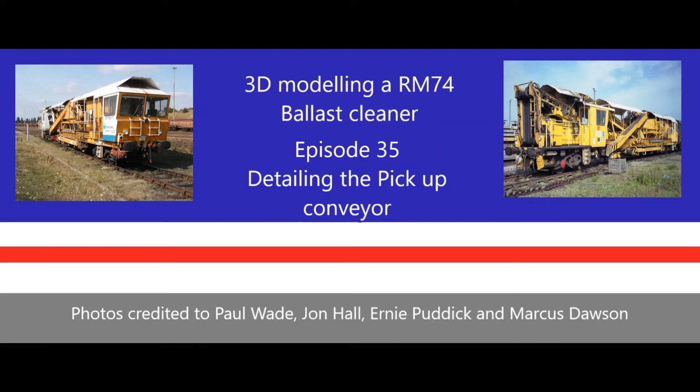In today's episode I'm going to start to look at some of the non-symmetrical detailing that's on the pickup chute here. If we look at the photograph, you can see there's a couple of ribs, 4 or 5 ribs coming along here, and some rivets. There's also some detail that I'm not going to be overly concerned about, like the top and the bottom edge, all the way along. You know, this is just a rubber mat coming along here.

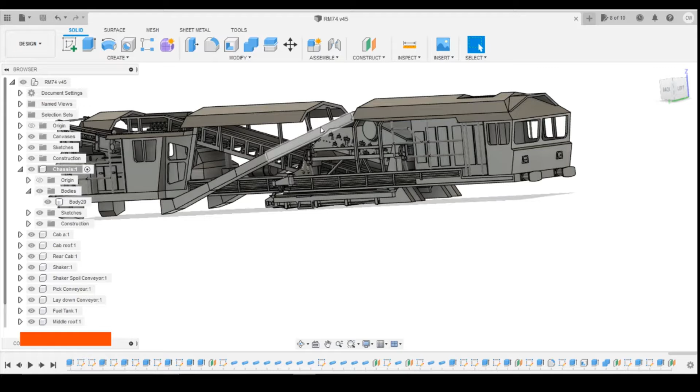This part here I will sort of do something here to give us the ribbed effect a little bit better, but certainly not the mats coming across the top sticking out. We will look at sort of adding the rivets in down the side there. So these ribs, they look like they start roughly where this post is here, so it's going to be all on this face that we're looking to draw these.

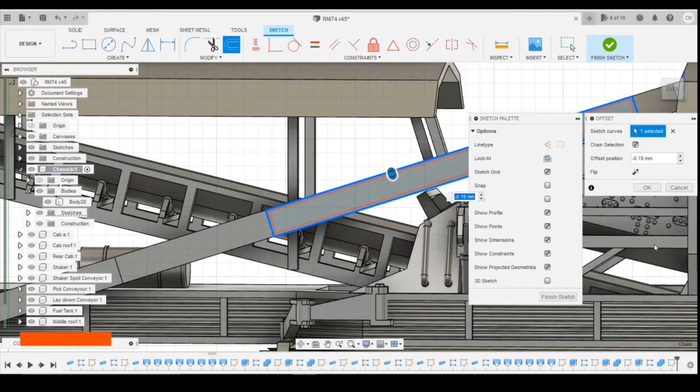So what I'm thinking of doing first of all is just putting an offset edge on the outside here. It's going to come inboard ever so slightly, maybe minus 0.2. And I think what I'll actually do is get rid of that line and that line, and just actually extend these lines to the end here. And on this, oops, do that. Extend these ones as well to that line,

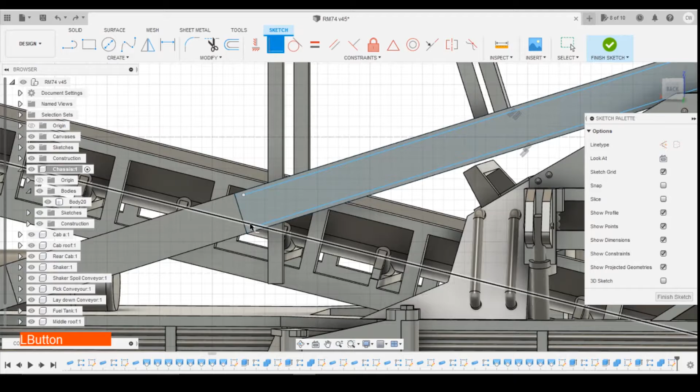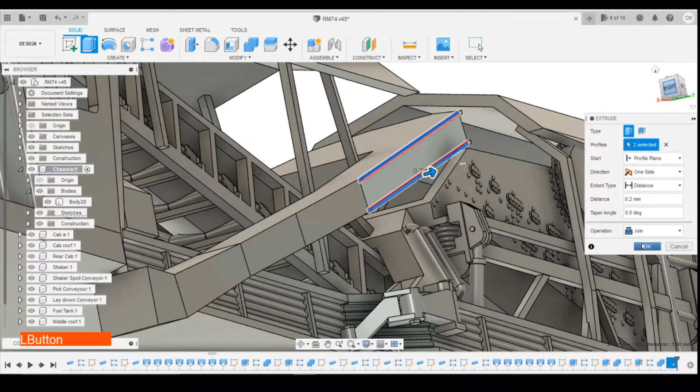and we can select those two profiles. I'm just going to extrude these, say 0.2, stick out a small amount, join, and we can put our ribs along there. So the first rib is slightly inboard of that one. So again, we're going to go the inside profile here, and we'll have to use a 3-point rectangle. Let's project first of all that line and that line, and we'll get that 3-point rectangle.

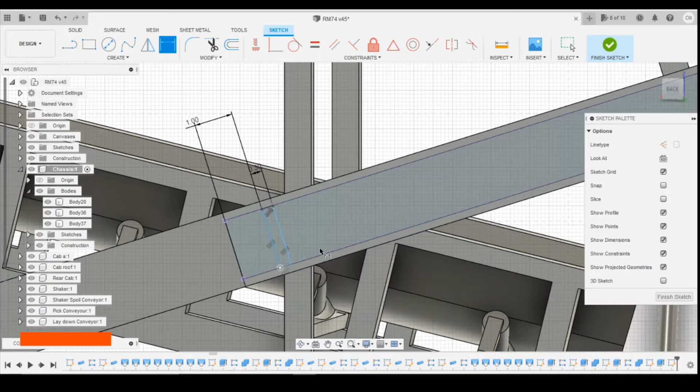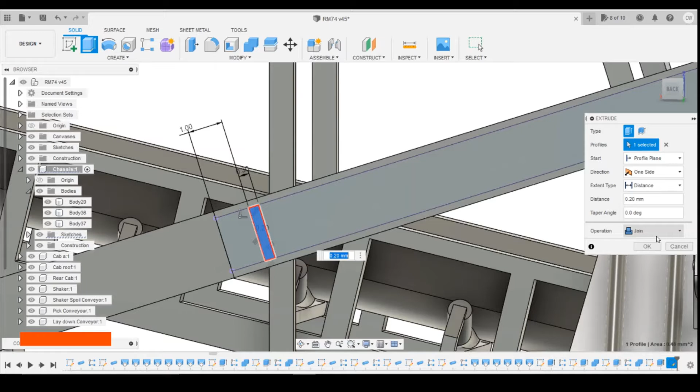So if we stick to the top edge, let's go for 0.3 thickness, I think, and then that can snap to the bottom edge, and then define the distance. I'm going to go for 1mm there. Not sure why that's not fully defined though. That's all constrained, so it should be. And we'll just fix. That's all extrude. Again, get that face. Extrude to that outer surface again. Let's try join to start with and see if it will pattern along using that. I'm pretty sure it won't.

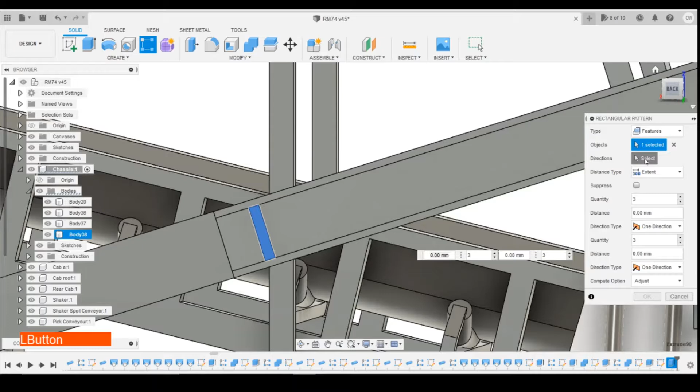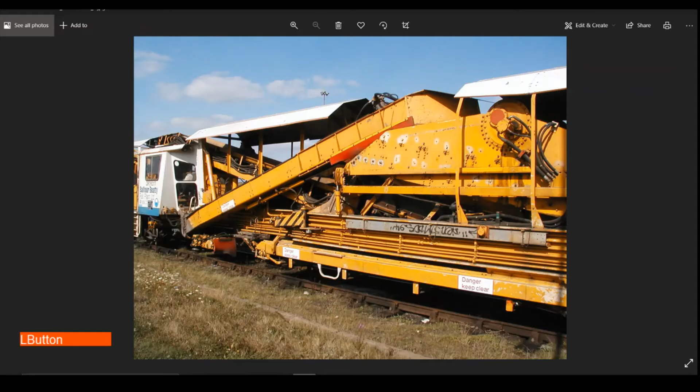So do feature. Yeah, see, it's going to go all the way along the top. So we edit that feature to be new body, and then pattern. Then it'll do it separately, direction along. And I think I said there was 5 of these. 2, 3, 4, 5. Yep. I'm just going to do the 5, and I'm going to bring those. That position there, I think. I'm going to do that 21.5 along, and then 5 of those. And then we can combine all of this lot together.

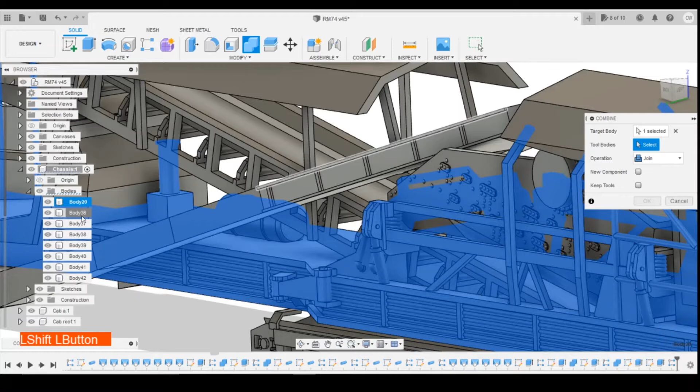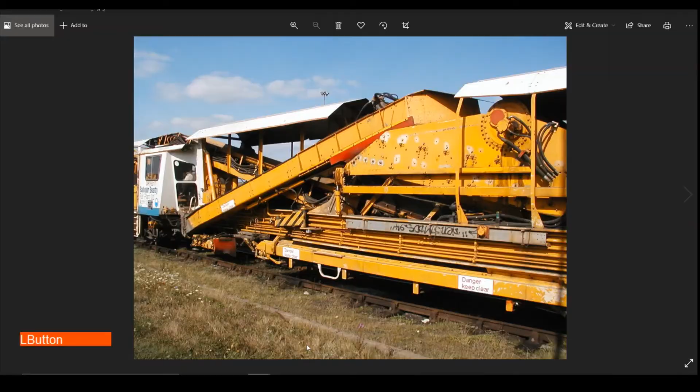So these ribs aren't on the other side of the conveyor belt here. I'm not entirely sure why this side's got them but this side hasn't, but I'll just go with what we can see. And then we've got a load of rivets we can look to add on here. We'll start from this bottom edge. I'm not going to worry too much about this slight recess area here. Okay, so I'm going to look at the rivets here. I'm going to start on this end. I think I'm going to start with these 4 here.

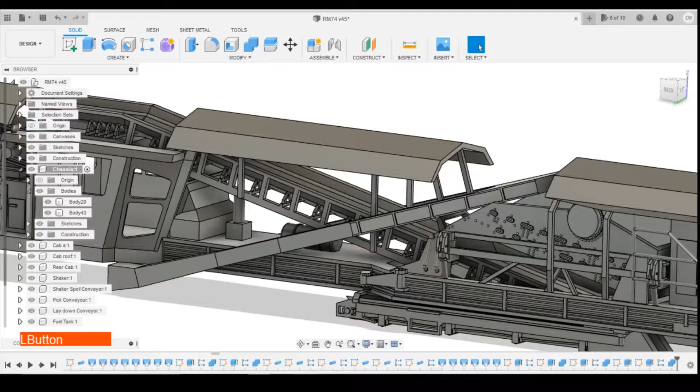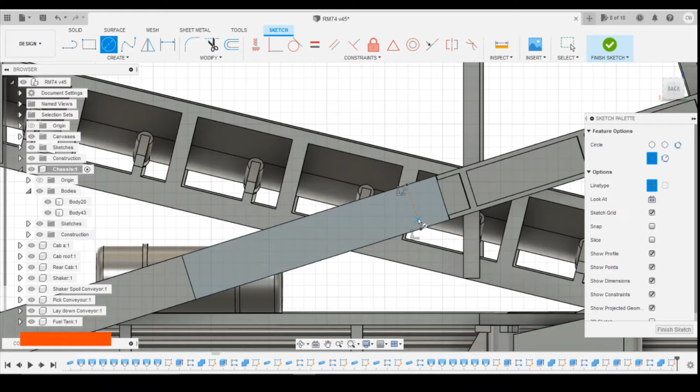So just going to create a sketch on the front face. We'll use our usual rivet design. In fact, what I'm going to do is I'm going to draw a line vertically and turn that into a construction line so that we can then make sure the rivet's in the right place. Let's snap to that. So 0.3 in diameter. Don't want that to be a construction line. Select that rivet.

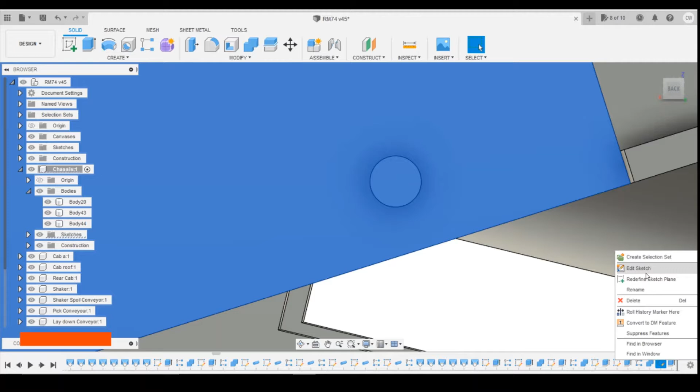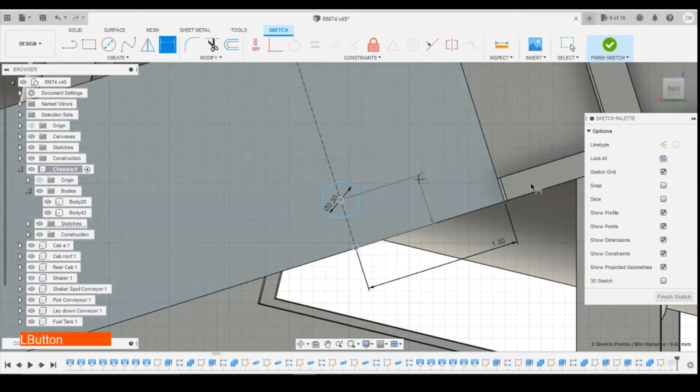25 in height. In fact, let's just go back into that in a minute. Look at the sketch. Just define distance to the end there. 1.3 mil. And the height of the rivet. It's in the wrong place. 0.3. And then we'll fillet off the top of that. 0.5. And then pattern it. So select that feature. Direction that way.

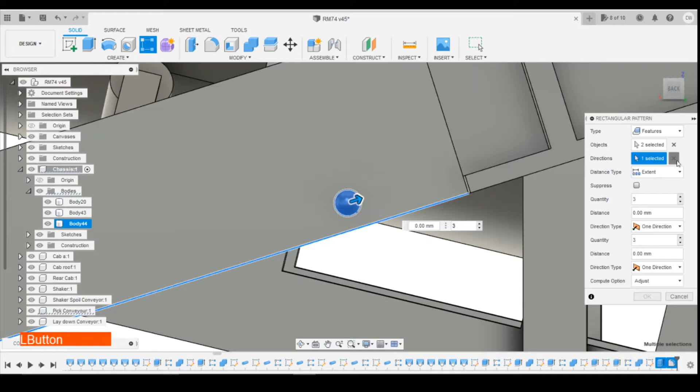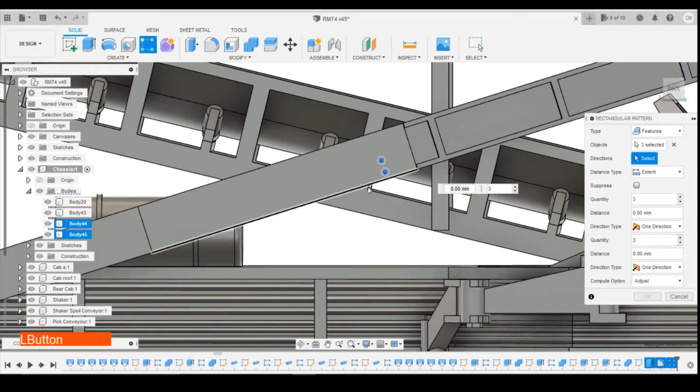No, in fact, I'm going to go vertically. Put 2 of them in. 0.4, so 0.5. They're probably a bit big, but obviously we've got limitations here. And then we'll pattern that in that direction. Just do 2 of them. 0.5 that way.

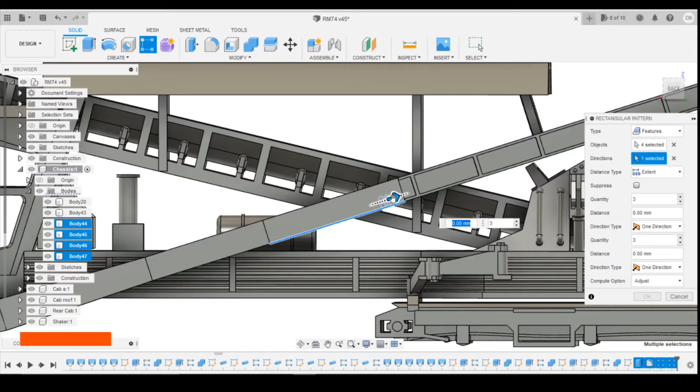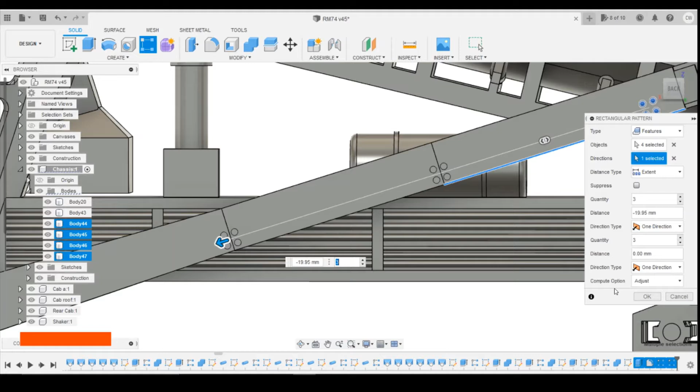Okay, so I'm now going to do these sets as well. So we're going to do the pattern tool again. So we'll select all of these features, direction, horizontal, and I'm going to put them at 19.75, see how that looks. It's a bit more. 19.95 puts it sort of overlapping there and there, which looks okay to me, I think.

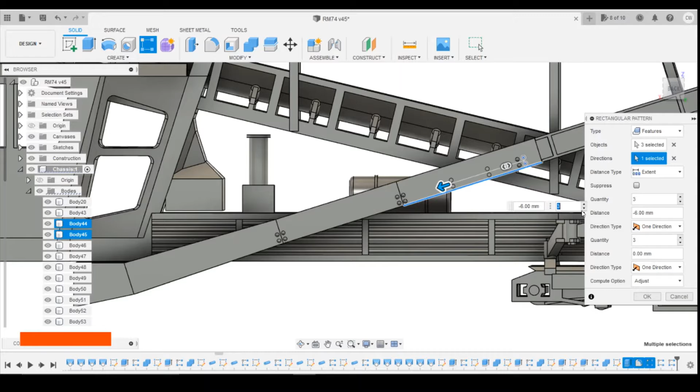Okay, so now looking, we've got 2 separate singular rivets in between these, so we can just pattern the original rivet plus the pattern of it. Direction, just do the 2 at the moment, get that in the middle, about 6mm there, and we pattern the same thing again. Just change that to 2. 15mm is probably okay there.

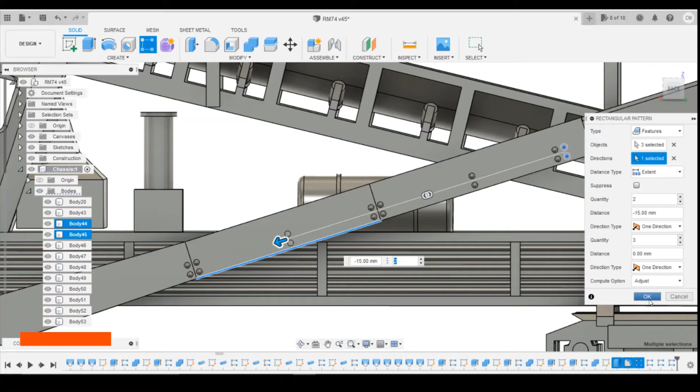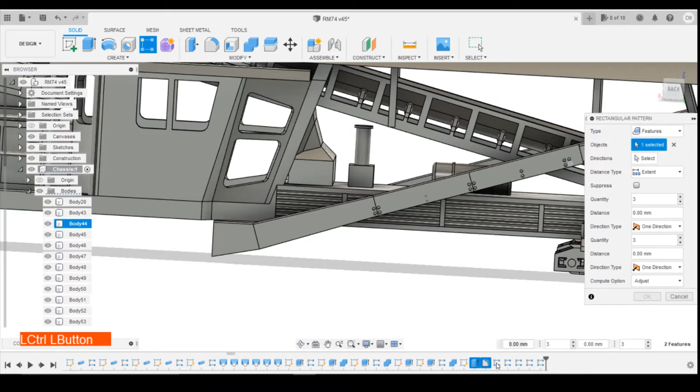Okay, so now we're just going to look at these last set of rivets down the end here. I'm going to just do another pattern. Take those 4 again. Come down that. That's what I thought might become an issue. Take that direction off. Try again on that one. Oh, okay, it's gone upwards. Let's undo that, start again. So that, that direction. Yeah, I did think that might be an issue.

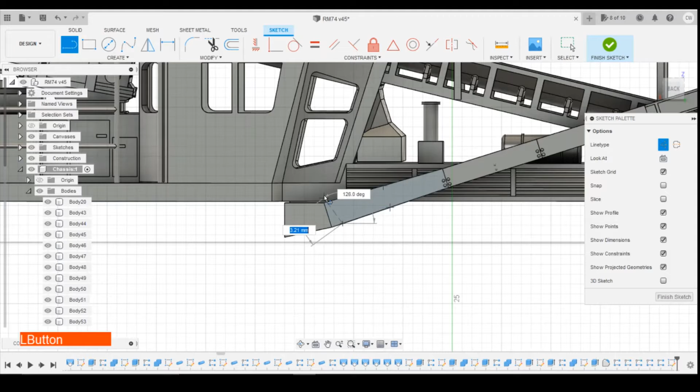So, what we'll do is we'll go about it a different way, and we'll draw on this face. Draw a line again. And there's a construction line going across, 90 degrees at this bottom corner. I'm not worried about the top edge. It's 90 degrees on the bottom edge here.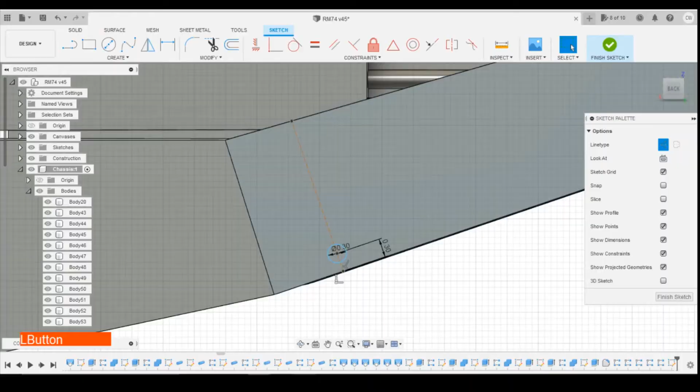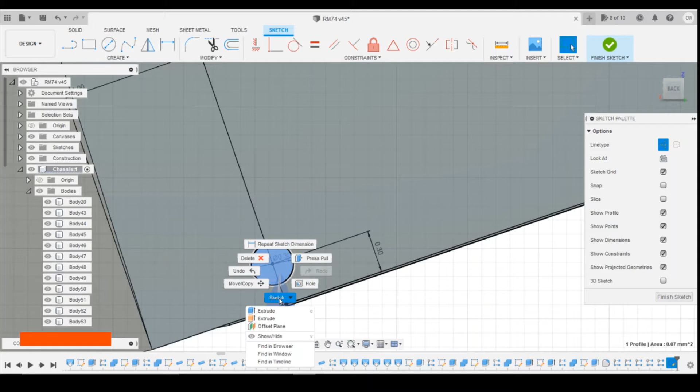Have a look. I'm going to put this dimension wise from there to there. About 1 millimeter. Catch up. Extrude this, and then fillet it.

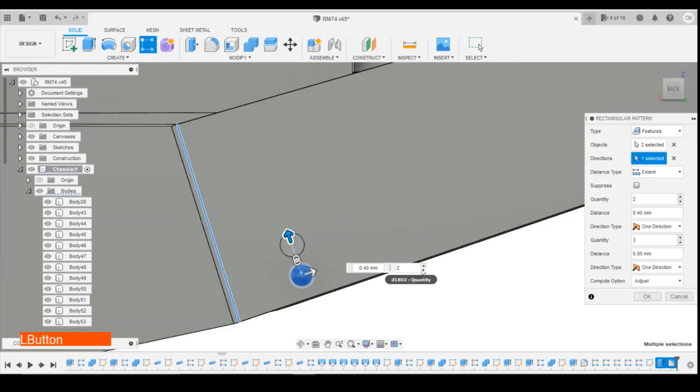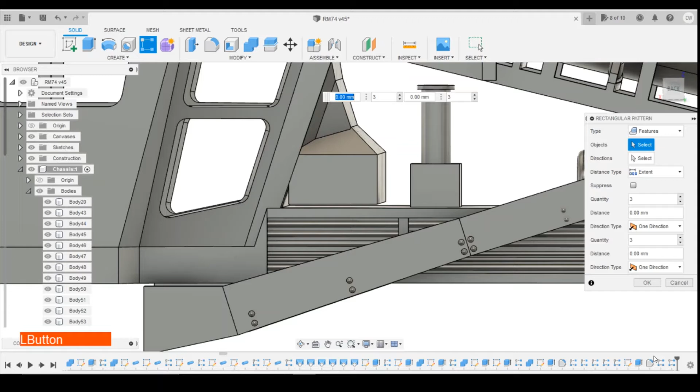Vertically, 0.5 is the gap again. And then we'll pattern these on the bottom edge, with 5.5 on there. Pattern that in that direction, 0.5 is the two of them. Okay, so now we've got all those rivets down the bottom edge.

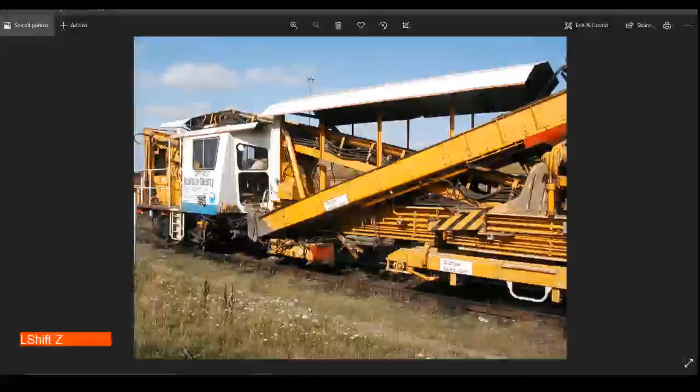So we've got some rivets on this part here. And these are going to be slightly smaller, I think. Although if they're small, they might not come out so well, but we'll have a look, see what happens. Draw on the face. Then we'll get a line to project that whole top surface. Draw a line, construction line. Define distance across, 0.3.

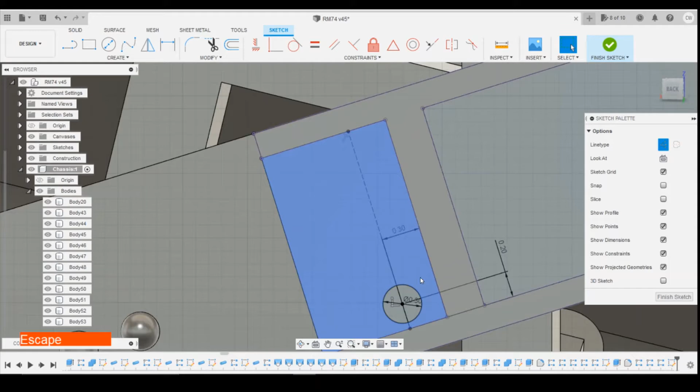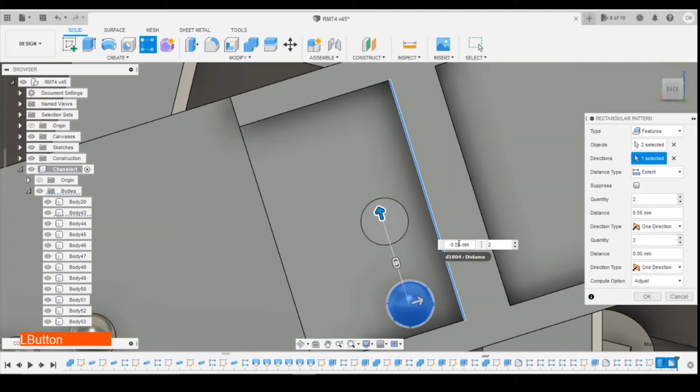Okay, so see I've done 0.2 height from the centre point. It's normal rivet size, 0.3. Fillet it off now. We can pattern that feature. The usual 0.55. Okay, going to pattern this.

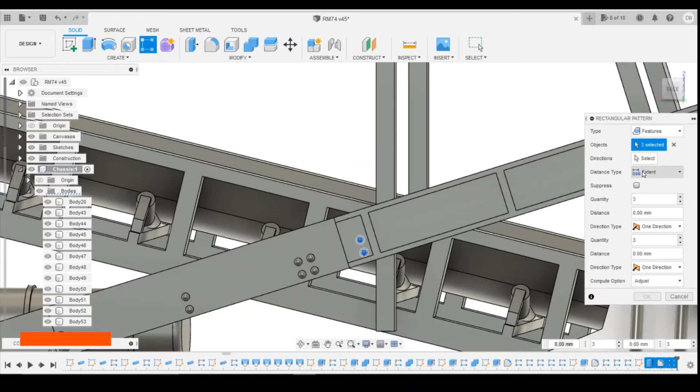Let's have a look. So it's before, after, in the middle. So I'm just going to do a pattern on this one initially. I'm going to drag that along. 6.3, doing 3 of them. I think this next one's going to be differently spaced, but we'll see. So 6.3,

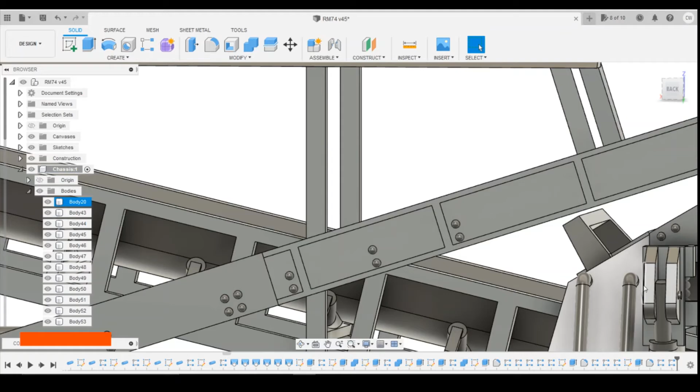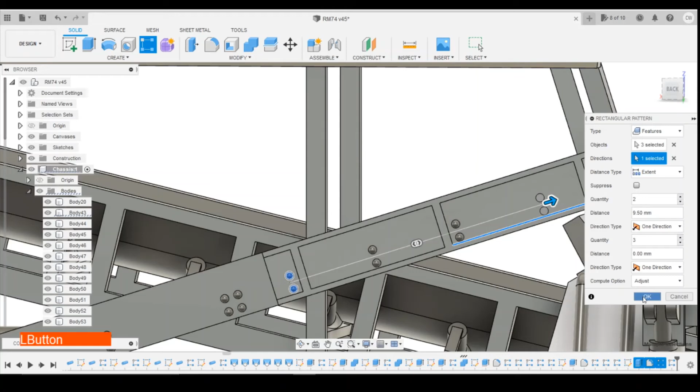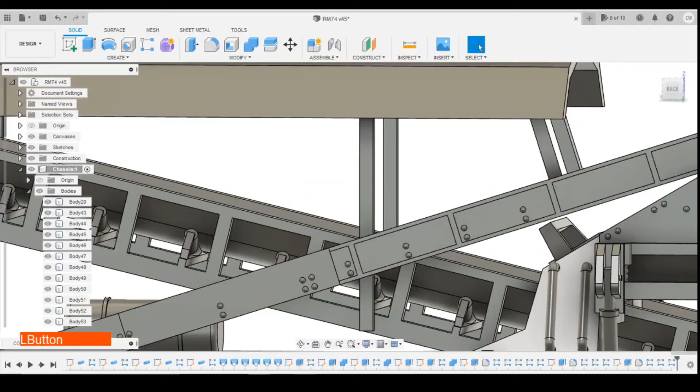and then we'll pattern that again. Come along, 2 of them this time. And this one I think is closer. And this one's going to probably be 9.5 across, up. Okay, let's have a quick look at the photo, see if there's any more further up. No, it's just those set there. Okay, so that's those all sorted there.

Okay, so I've just realised I've drawn all of these in the wrong part, so what I'm going to do is transfer them all over. It won't bring the sketches, unfortunately, but I can transfer the bodies. If I do move to group and pick the bodies part in the pick conveyor, the way they're supposed to be, then they'll all move across to that group. Just catch up a second.

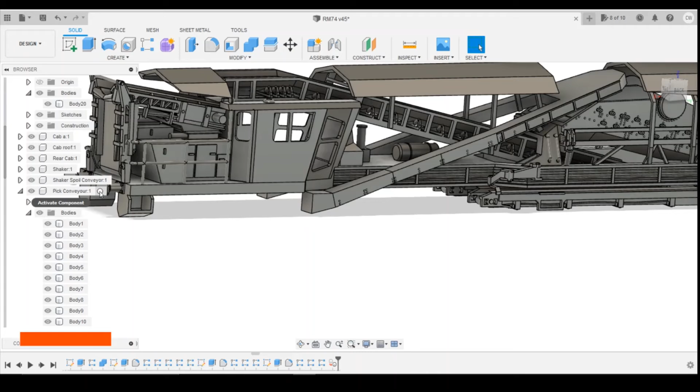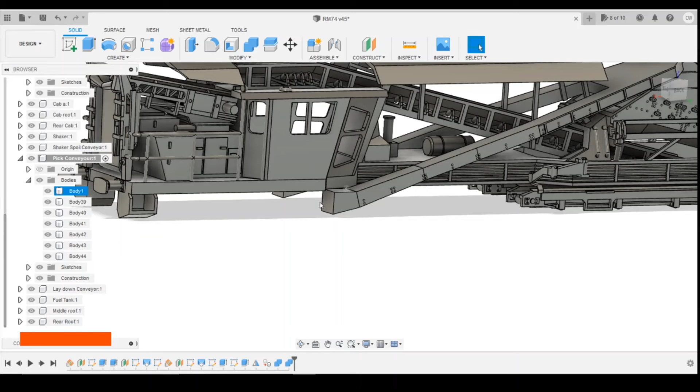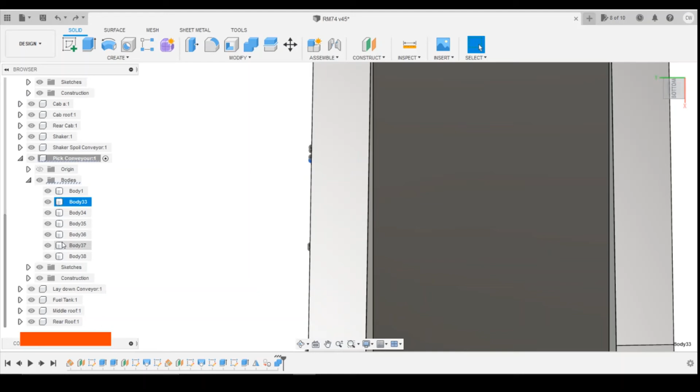And then what I can do then is merge these. That's obviously keeping the chassis set, but I can combine all of this. Like if I select that pick conveyor, combine body 1, which is the initial conveyor, with all these extra bodies here. Okay, so why won't these combine? So that one with this lot. Okay, so if they're not combining, that must mean they're not touching for some reason. So if we have a look at these. There must be some daylight there. So if we just have a quick look, bring that back around.

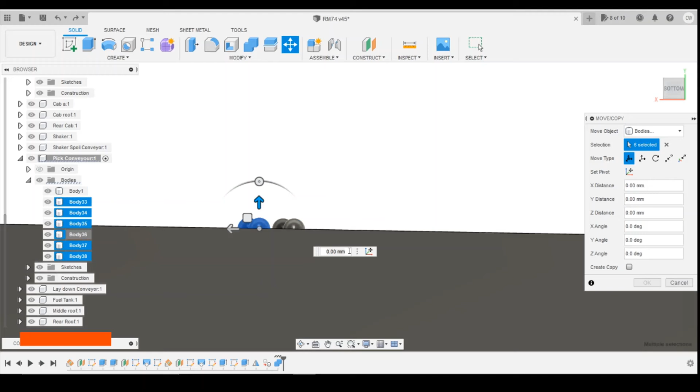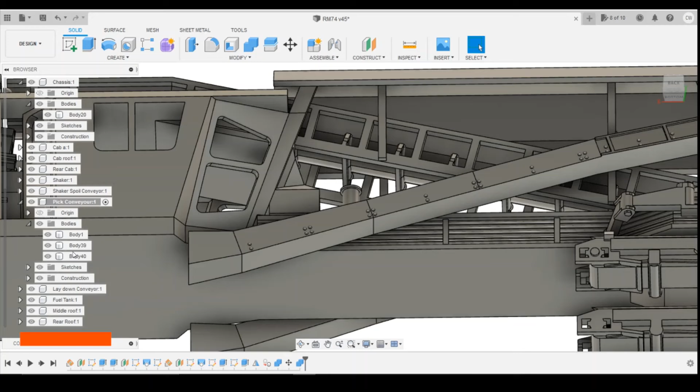Select all of them and do move, spin it to the bottom, and then move this back in by minus 0.05. No, that's too much. Minus 0.01. And hopefully they'll combine then. Okay, so 2 more. So those 2, copy. Same thing. Come back in by minus 0.01. Hopefully that means they're touching now. Okay, that's that solved.

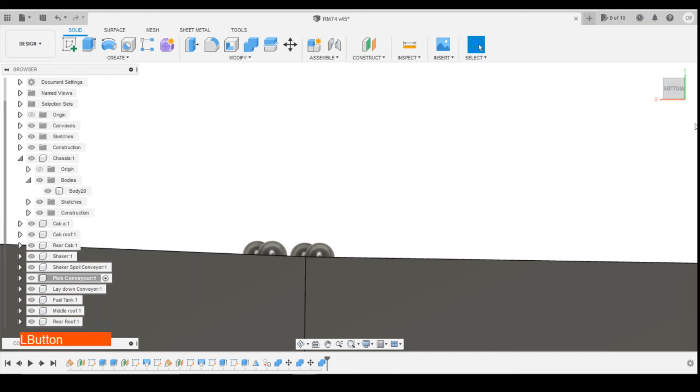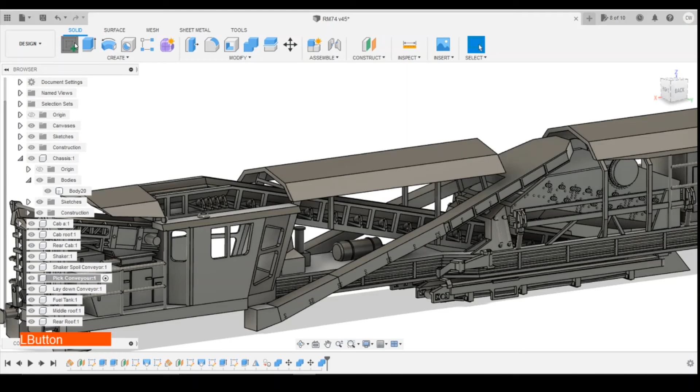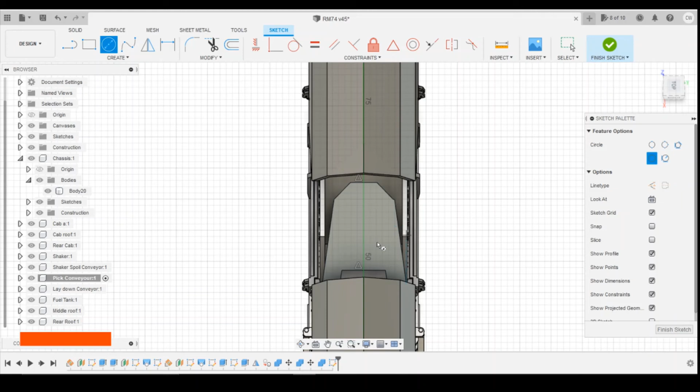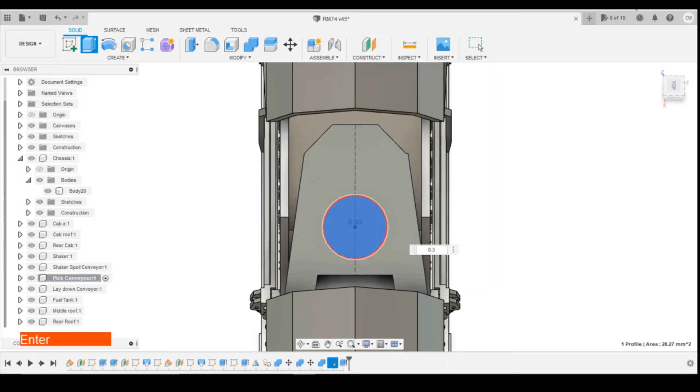So we've got the pickup selected. We can select that top surface and press the circle, and I want that actually on the midpoint, so I'm going to just draw a line from that midpoint down and convert that to a construction line and draw a circle. I think I'm going to go for about 6mm diameter circle, and then from there to the base there I'm going to draw that 4.5mm. Extrude this up by 0.3. So the sort of base plate we're sitting on now.

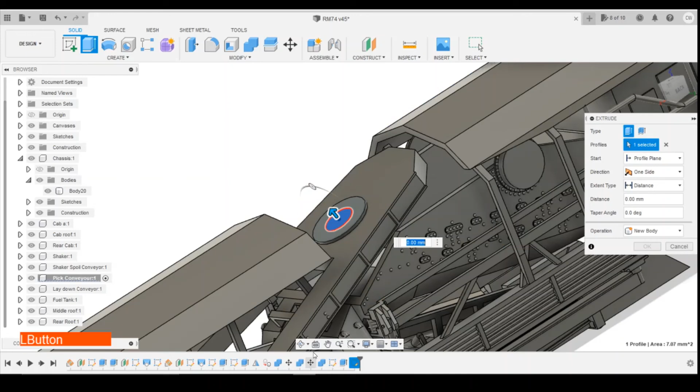And on top of that, I'm going to draw another circle using the midpoint. I'm going to go for 3mm in diameter on that. And I'm going to come up by, I reckon, about 1.2mm. And then on the top surface of that, I'm then going to draw another circle. 1.5mm, and then we're going to extrude that, and I'm probably going to go 2mm on that.

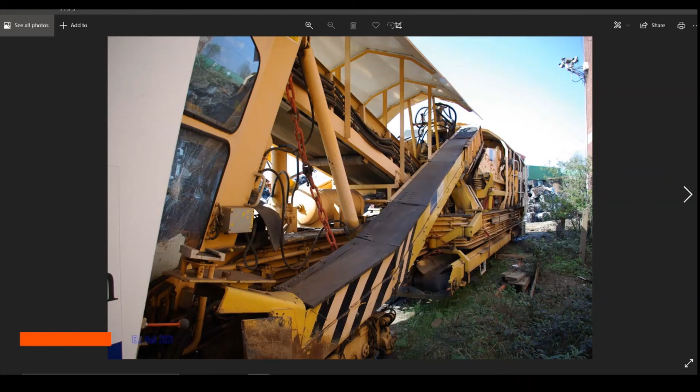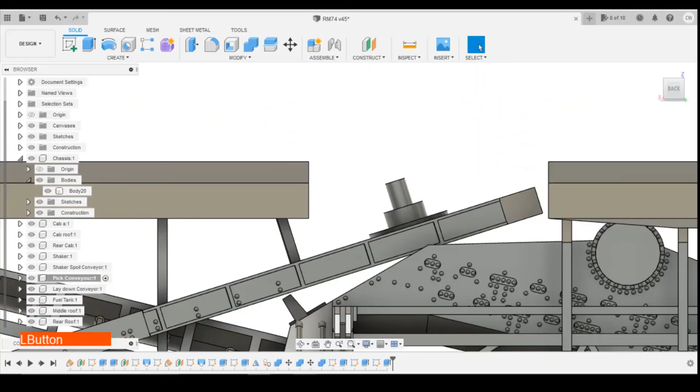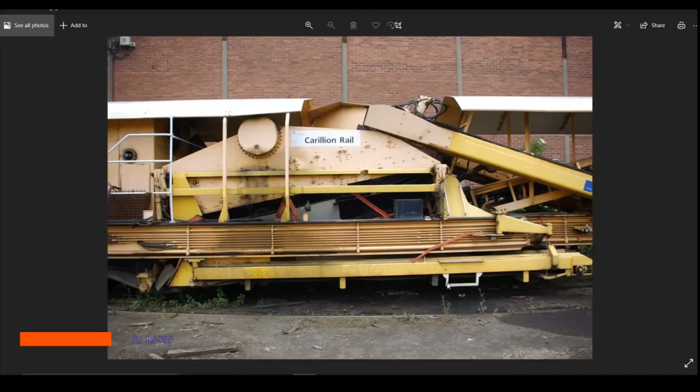Again, turn side on. Make sure it doesn't stick out the top of the roof, which it doesn't. So you can't really see anything from the side photos, but that looks like it's coming not far off the top of the roof there. It's probably about right. Maybe edit that bottom base to 0.5. Catch up. So yeah, it's a little bit thick on that bottom base, and I might actually just bring the top up to 2.3.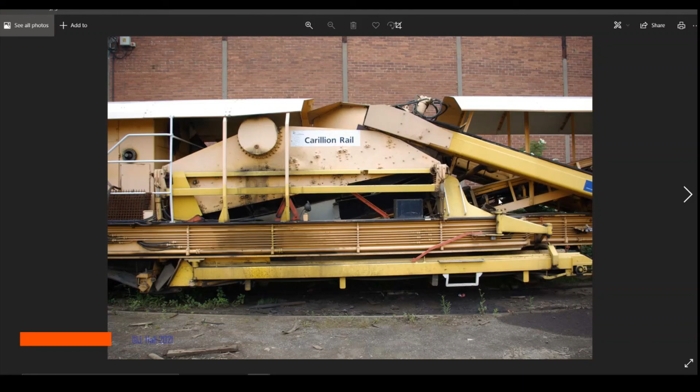I'm not going to draw any of these hoses on the top here because, again, they're just too brittle. It's not really worth it. So yeah, we'll leave that all off there. It gives us a reasonable representation of the motor on the top there. I think that side is pretty much done now.